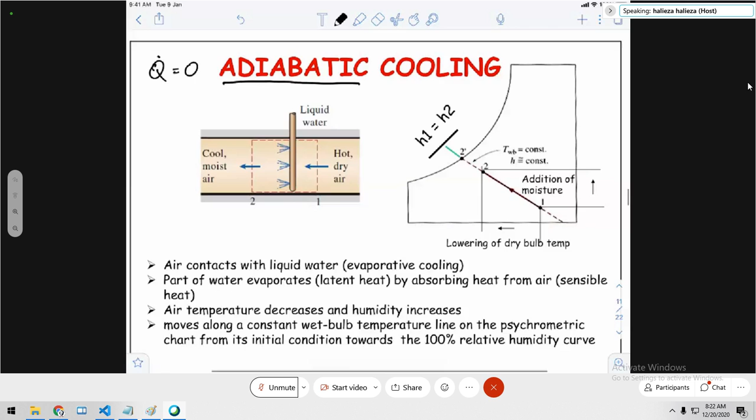So what happens here is you have hot air coming in, and you spray liquid water into that hot air. The water droplets will evaporate into the air, so there will be evaporation going on from the water droplets. When the liquid water evaporates, it absorbs heat from the hot air. So the hot air will cool down because its heat has been transferred to the liquid water. The heat is being taken from the hot air, going into the liquid droplet, which causes the liquid droplet to evaporate.

This is the system that sometimes you see in an outdoor restaurant at the patio, where you can see a huge fan with mist or water droplets being sprayed into the front area of the fan. This is the same principle, whereby the water droplet evaporates, causing the surrounding air to cool down. Sometimes you also have the portable aircon - it's not really an aircon, but it's a portable aircon that uses the same principle, which has the mist sprayed in front of the fan. Yeah, so this is the same principle.

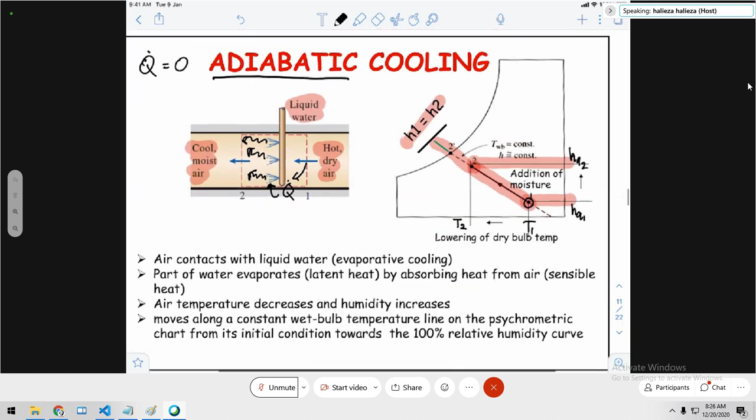So that is all about adiabatic cooling. You cool down the air adiabatically. That's what you need to know about the humidity chart. I've already introduced this part.

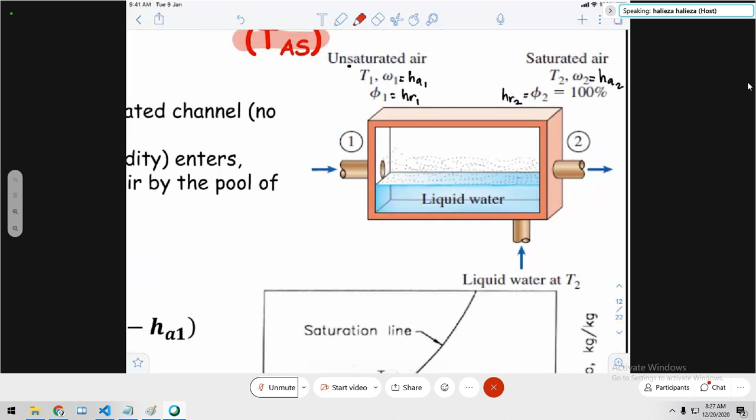There's another thing that you sometimes need to find: the adiabatic saturation temperature, symbol capital T subscript AS. This is the same principle, except now your liquid water is not in droplet form - it's really huge. You have a very long channel here containing liquid water. Your hot air is coming in at T1, having an absolute humidity of HA1 and relative humidity of HR1.

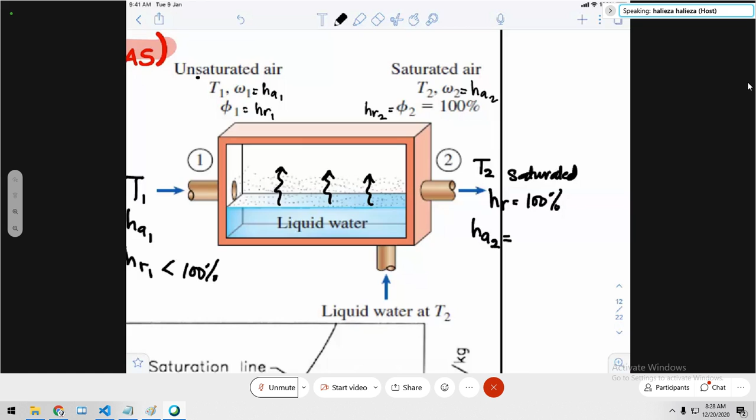By the time the water evaporates into that inlet air, because of the very long distance the air has to travel over the liquid water, by the time it reaches the outlet, that air at temperature T2 will be saturated. That means your relative humidity is going to be 100%. Before this, your relative humidity is less than 100%. If it's 100%, there's no way it can accept any more water vapor. So by the time it reaches the outlet, it should be saturated. Your absolute humidity is denoted by HA2, and definitely HA2 is much, much greater than HA1, the inlet value.

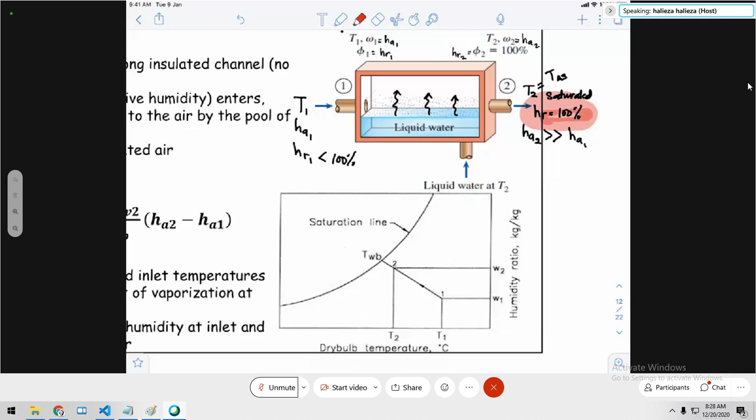So this is the temperature - T2 is going to be your adiabatic saturation temperature. That's the title of the slide, your adiabatic saturation temperature. So how to find that adiabatic saturation temperature is by going towards the 100% curve. So in order to find the adiabatic saturation temperature, it will be on the 100% curve. If you project it until it reaches that curve, then you will get your adiabatic saturation temperature. That's the equation here. Let's look at this, okay.

Oh dear, what am I doing? I'm trying to highlight this.

Your adiabatic saturation temperature is the same as your T wet. Why? Because your T wet is also obtained on the 100% curve. So if you drop that down, you will get your T wet or your adiabatic saturation temperature. It will be the same. Your adiabatic saturation temperature is going to be the same as your T wet bulb temperature.

If you want to calculate the temperature of your outlet, this is the equation that you can use, provided you know the latent heat of your water at T2, the outlet temperature. You need to know the latent heat of your water at the outlet temperature. If you know that, it shouldn't be a problem to calculate the outlet temperature.

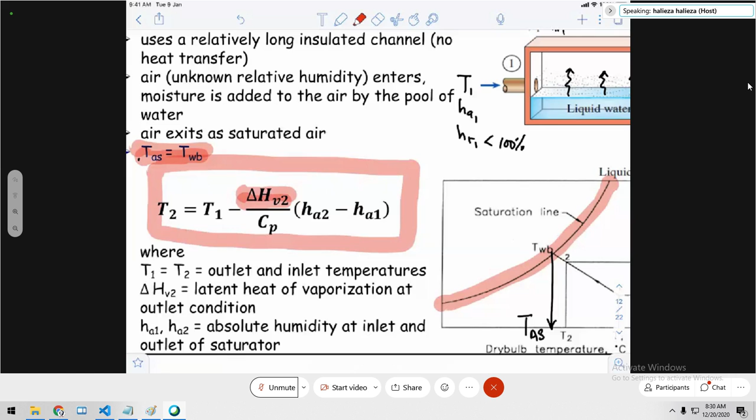But if you're going to calculate the adiabatic saturation temperature, you can just read it off from the psychrometric chart by projecting your line from the point of interest, the initial condition, to the 100% saturation curve. Then you drop it, and you will get your adiabatic saturation temperature. It's going to be the same as your T-wet temperature. T-wet bulb temperature is going to be the same as your adiabatic saturation temperature. That's another thing you need to know.

Let's see whether we have one example. Any questions so far before I proceed with the example? Anybody want to ask anything on this topic? Clear, good, thank you Ibrahim. Somehow nobody wants to speak. Everybody prefers writing, that's okay, no problem, but it took quite some time to type. It's faster to speak, but then it's no problem.

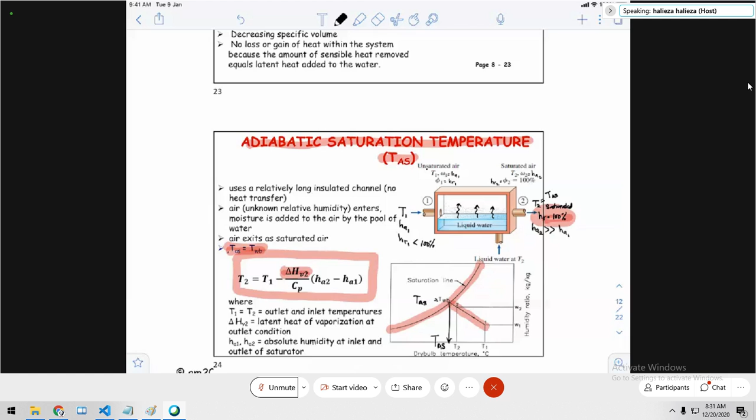Let's proceed with an example from your textbook. You have a stream of air at 30 degrees C, 10% relative humidity. It's going to be humidified in an adiabatic spray tower. The pressure for that system is 1 atm. The outlet air is not going to be saturated, it's going to have a relative humidity of 40%. You need to find the absolute humidity and the adiabatic saturation temperature of the entering air.

That means you're going to find the T-wet. The adiabatic saturation temperature and the T-wet are going to be the same. Let's look at our chart - I don't have my chart over here, I need to get my chart. I need to use the psychrometric chart, so let's look at our psychrometric chart in SI units.

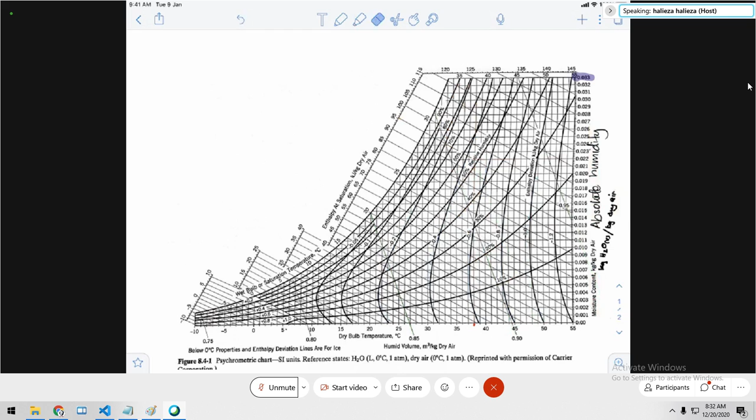Let me erase this, there's too many things here that will confuse us. Let me tidy it up, and bring this over to the example so we can have everything in the same slide, the same view. Let me just copy this.

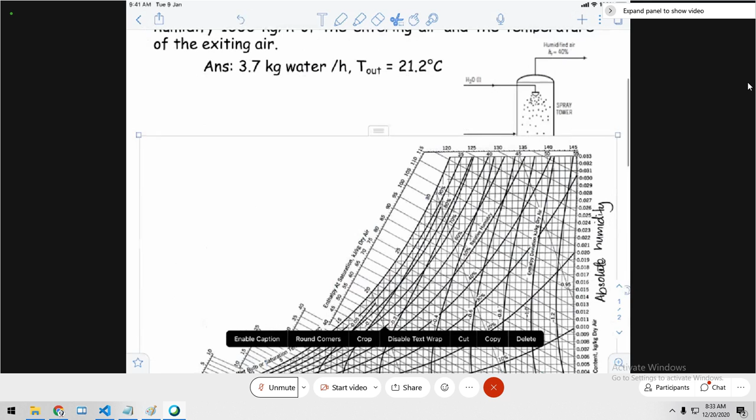That's done, let's see what is being asked here. You need to locate your inlet air position on the psychrometric chart. The air is at 30 degrees C and 10% relative humidity. Let's look at your psychrometric chart - I'm going to change the color of this pen so it's not black, or else it won't be that obvious. Let's use red. That's 30 degrees C, I'm going to project a straight line.

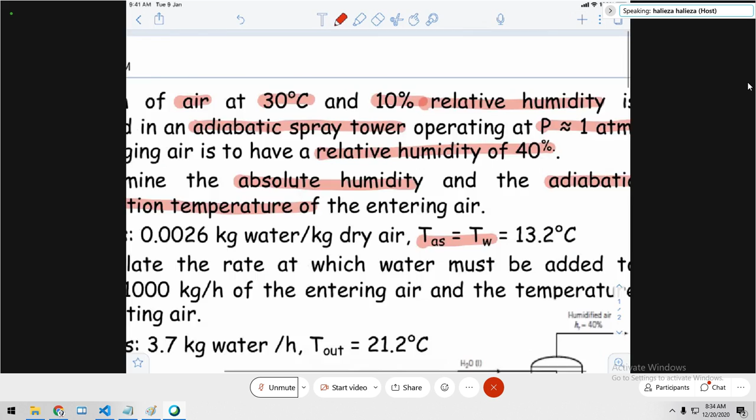Try to get a straight line - yeah, that's a straight line. The relative humidity is 10%, not 10 degrees C. So if we highlight the 10% relative humidity curve, where the two of them intersect - the 10% curve and the 30 degrees C line - is the point of interest. If I enlarge this, our point of interest is going to be here.

So that is your inlet position of your air. What else do we need to know, what else do we need to find from this question? You are asked to determine the absolute humidity, which is on the right hand side on the y-axis. Your absolute humidity is the moisture content.

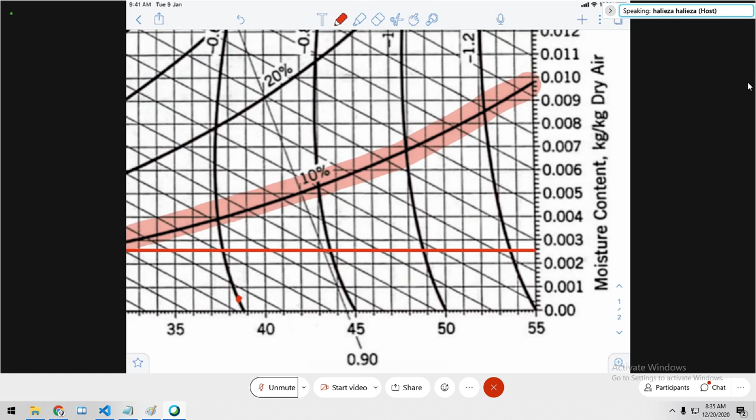If you project it horizontally from that point of interest to the y-axis, you're going to get a straight line. Roughly, if you look at the scale, it's going to be about 0.0025 or 0.0026. If I enlarge this, that's roughly the value of your absolute humidity.

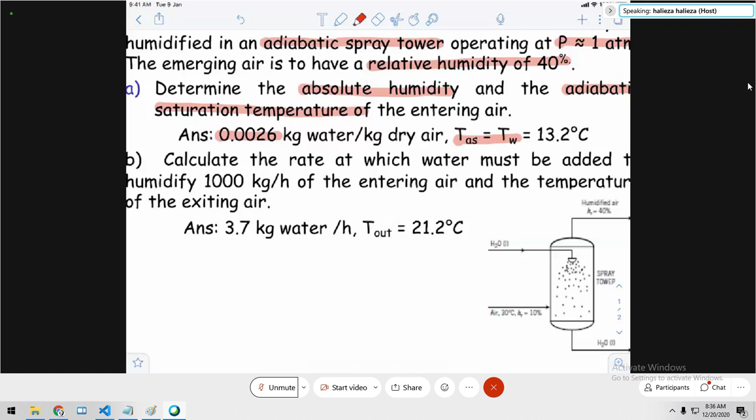So let's have a look at the solution. The solution here gives you a value of 0.0026. That's roughly what we also obtained just now when looking at the psychrometric chart. It depends on how straight your line is, and also how you draw your line. So it's roughly about 0.0026.

The other part of the question asks for the adiabatic saturation temperature. To get that, you need to project from your inlet condition diagonally towards the enthalpy, using the enthalpy line. I'm going to change the color to green. So your enthalpy line, that's the diagonal slanting line.

So you project from your point of interest, parallel to that enthalpy line, towards the 100% relative humidity. I'm going to draw that straight line diagonally from the point of interest towards the 100%, parallel to the slanting line. Make sure I can get it straight. Okay, that's roughly a straight line.

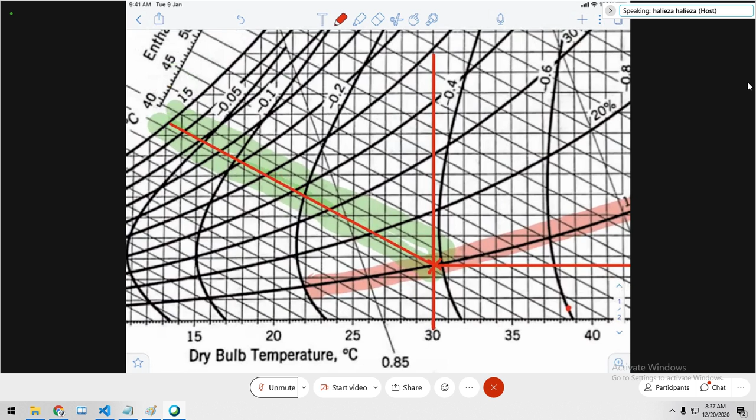If you look at the 100% curve, you also have the temperature given there. This is 10, that's 15. Let me undo that, I'm not going to have it in green color, let me use red instead. Okay, that's 10, that's 15. So our adiabatic saturation temperature is about, let's see, 11, 12, 13, about 13.5. Roughly, it could be 13 or 13.5, but I don't think it's 13 because it's not directly on the enthalpy line or the wet bulb line. It's somewhere around 13.4 to 13.5 roughly. So let's have a look at the solution.

(13.2). Okay, this is the answer here, giving a value of 13.2. Now I said our value is about 13.5, so that's acceptable - the answer 13.2 is not an absolute value. The author also obtained it using the psychrometric chart, so it's acceptable, 13.5 versus 13.2. But definitely it's not going to be 13, because if you look at 13, that's 13, and it's not on that line, on the slanting line, at 13 degrees C. It's definitely not 13 degrees C. So that's how you get your adiabatic saturation temperature for that inlet air condition.

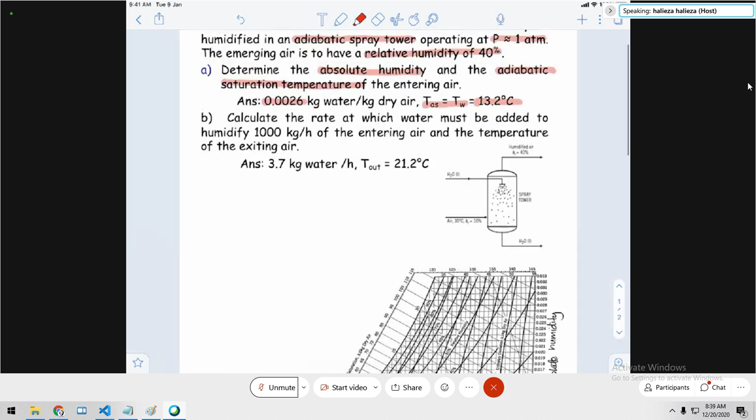Okay, next, what's the question asked for? Calculate the rate of water that must be added if you're going to have 1,000 kilogram per hour of the entering air, and the temperature of the exit air. We know that the air is going to come out at 40% relative humidity. Okay, so we're going to highlight that 40% first on the chart.

So if I'm going to highlight the 40%, this is the 40%. From the intersection of the red diagonal line that is going towards the 100% relative humidity, with the 40% relative humidity line, you will be able to get the point of intersection, which is over there. Let me undo that - this is your point of intersection. So if you look at that point and drop off, you get a straight line going towards the x-axis.

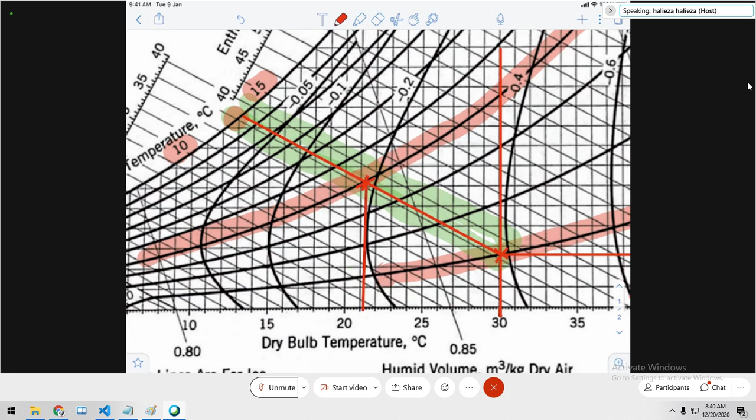I'm not really doing it very well because it's not really a straight line. It will be roughly 21.3 maybe. That's the temperature of your exit temperature. Let me write that using black color ink. That's about 20... 21.3 maybe, we see roughly.

So let's have a look at the solution. The solution over here listed it as 21.2. Well, very close, we got 21.3.

Okay, we got 21.3, but the solution gives us a value of 21.2. If you get 21.2, if you get 21.4, obviously it's not 21 because it's not on that straight line. There is somewhere beyond 21. That's the exit temperature.

The second part of the question asks you to calculate the rate of water that needs to be added in. That means the amount of liquid water that you're going to add into your inlet air. How are we going to do this? We're going to do a material balance on the water, because we should be able to calculate that if we know the relative humidity of the inlet and outlet air.

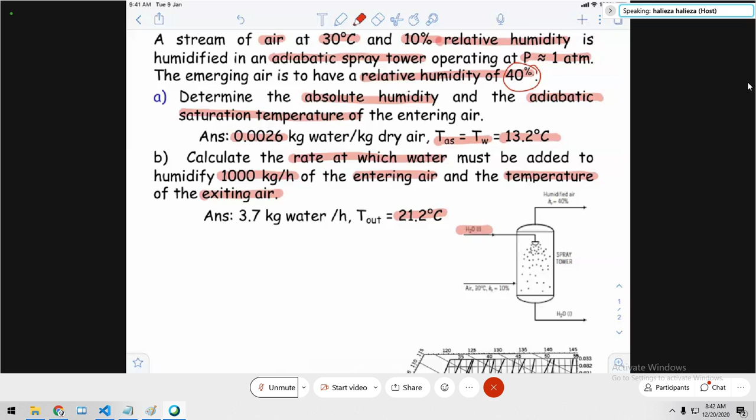So let's get the absolute humidity of your air for the outlet first. Your outlet temperature we already managed to get just now. Now we need to get the absolute humidity.

From the point of interest of the outlet condition, I'm going to use red. So that's the point of interest. I'm going to project a straight line. This is really not a straight line. That roughly goes there, and that is your absolute humidity for the outlet condition.

It's about 0.006, let's see. I would say it's not 3 because my line is not really that straight. If you have a look at the line, it's about 0.0062. Okay, so let's take it as 0.0062.

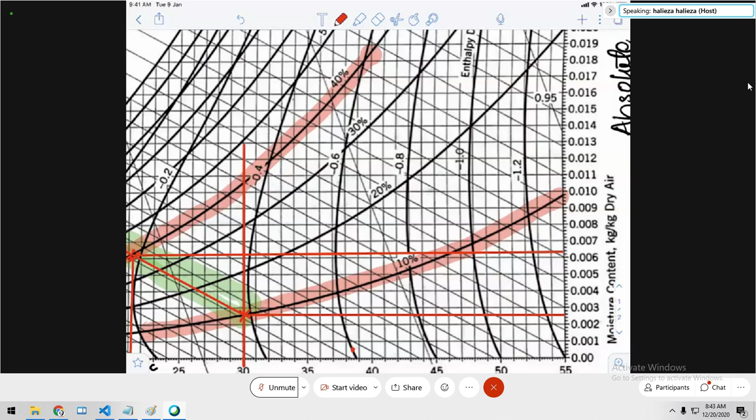That's for the absolute humidity of the outlet air. So I'm going to write that here. My outlet, HA2, is going to be here, in black color. HA2 is equal to 0.0062 kilogram... I don't have enough space to write. Kilogram water vapor

per kilogram dry air. And for the inlet, just now, for the inlet A, we managed to get about 0.0026. Okay, for the inlet HA1, we have the absolute humidity of 0.0026 kilogram water vapor per kilogram dry air.

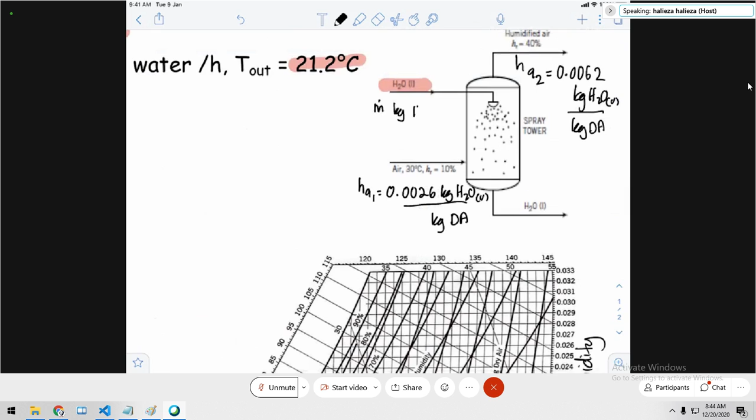So the amount of water that we're going to add in, we're going to give it a symbol of M with a dot - that's a flow rate, kilogram water liquid per hour. The question states that you're going to have 1,000 kilogram per hour of the entering air. So your entering air is going to be 1,000 kilogram per hour. That is your humid air.

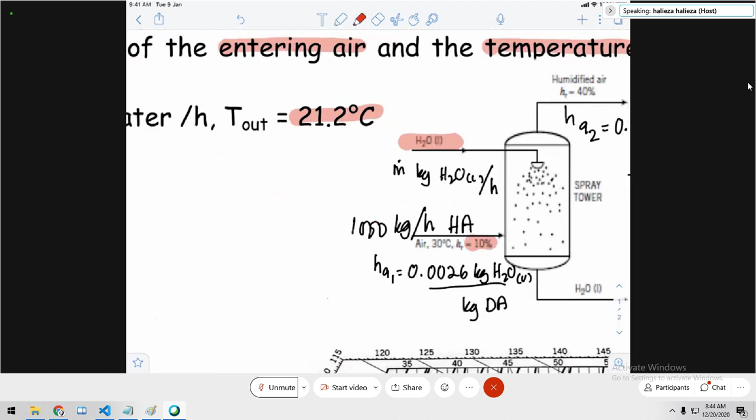Why is it humid? Because you have 10% relative humidity there. That implies there is water vapor inside your inlet air. So it's humid air, it's not dry air. But the thing is, in order to do the material balance for water, the unit for the absolute humidity is per kilogram of dry air.

So you need to find the kilogram of dry air that is entering. The amount of dry air that is entering is going to be the same amount that is in the outlet air - it's going to be the same in the inlet and the outlet.

So we need to find the kilogram of dry air coming in, and in order to do that you need to use the absolute humidity of your inlet condition. So let me write that using black ink. Coming in is 1000 kilogram per hour of your humid air, and you have a value of 0.0...

I need to find the kilogram of... let me see, I need to find the value of the entered dry air. Anybody have any idea? I can find the value of the water if I use the absolute humidity, but not the value for the kilogram of dry air. So anybody have any idea how to find it? Anybody? Nobody?

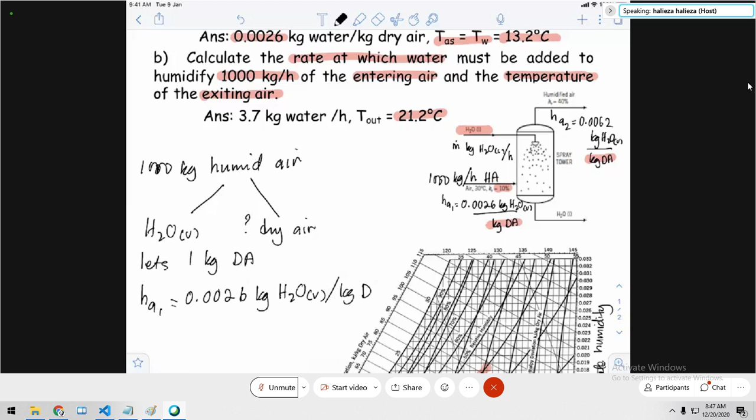Based on the absolute humidity of the inlet air, you have a value of 0.0026 kilogram water vapor per kilogram of dry air. That is the value you get from the psychrometric chart earlier. If I enlarge it, zoom in, that's the value we got, 0.0026 at that location. So that is the absolute humidity, and the unit is per kilogram dry air. So if you assume it's going to be 1 kilogram of dry air, that means for every 1 kilogram of dry air, you're going to have 0.0026 kilogram of water vapor.

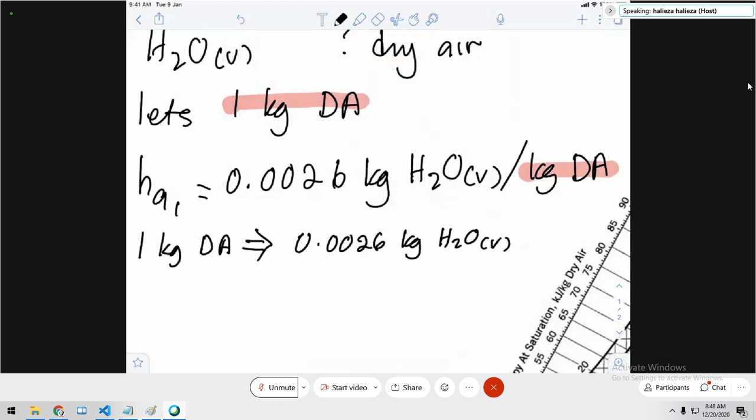For every 1 kilogram of dry air, the amount of water vapor is going to be 0.0026. So if we put that value here, the amount of dry air we say is going to be 1 kilogram, and the amount of water vapor you're going to have is about 0.0026 kilogram.

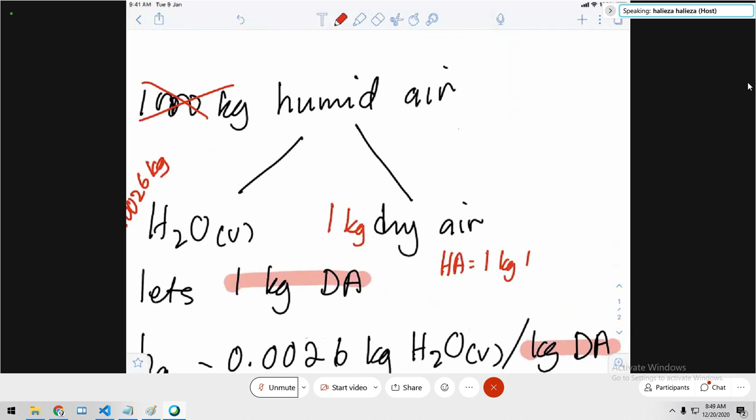So the total amount of humid air - don't look at this part, we're not going to look at this part because we already assumed 1 kilogram of dry air. So your humid air is going to be 1 kilogram dry air plus 0.0026 kilogram of water vapor. That gives you 1.0026 kilogram of humid air.

So we need to know this, because based on that value, you can use it to change that 1 kilogram into dry air. This is humid air, this is also humid air, then you can change your humid air into dry air, the value for the dry air. So let's do that.

Any questions so far? This is the tricky part, whereby you're going to use the information by assuming 1 kilogram of dry air. That's the tricky part. Any question? Anybody? Nobody? No question? Are you with me, guys? Am I speaking alone?

I hope there's no lagging, because I don't know what's coming up for your psychrometric chart. Dr. Jamaliza is going to set that question. She only said that you need to print the psychrometric chart, it's going to be given to you, and you need to print it out. You need to turn it in together with your solution, you need to scan it together with your solution, because she'll be giving marks on how you get the values from the psychrometric chart. So you really need to know that. And then this question, example 847, I'm not sure whether it's coming similar to this example or somewhere similar to the other example. I don't know. So just be prepared.

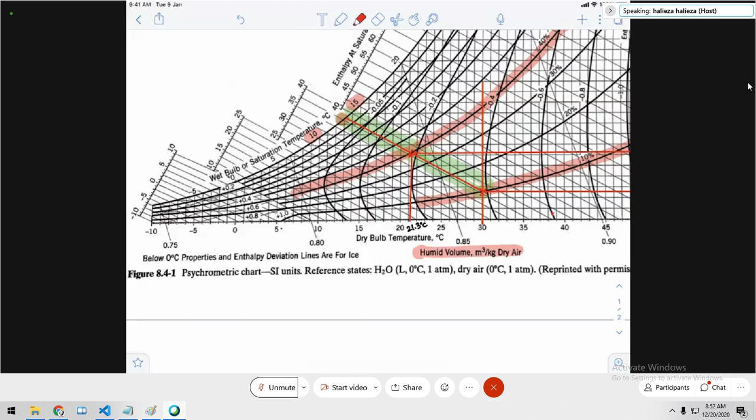Before this, we were given the volumetric flow rate of the entering air, and we used the humid volume from the chart, but this is slightly different - you are given in kilogram, not the volumetric flow rate. Before this, for the previous example, we were given the volumetric flow rate of the humid air and converted it into dry air by looking at the humid volume from your psychrometric chart. You have done that using the previous example. So the difference in this example is that your entering air is not given in the volumetric flow rate, it's in terms of mass flow rate. That's the difference.

So now, to get the dry air coming in, I'm going to proceed further down here. You have 1,000 kilogram per hour of humid air, and you know that for every 1 kilogram of dry air, you have 1.0026 kilogram of humid air per kilogram of dry air. That's why when you did the calculation just now, you assumed 1 kilogram of dry air, to make sure this unit is for every kilogram of dry air. So now, using that value, you should be able to cancel your kilogram of humid air and end up with kilogram of dry air per hour.

So if you do that calculation, your answer will be 997 - somebody check, I get that value from the textbook, not sure whether that's correct. So let's do the calculation... 997.406, okay just write 997.4. Okay, Sam, thank you Muhammad Salim. Okay, Sam Ibrahim, okay good.

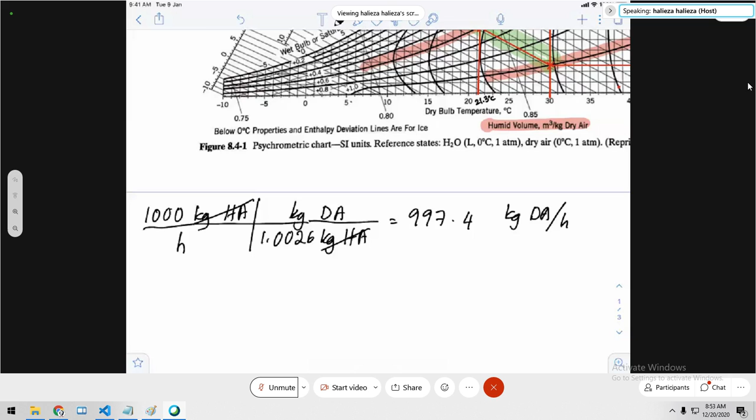So that is your amount of kilogram of dry air coming in every hour. So if you look at the diagram, we're going to write that - I'm going to erase this, I'm going to write that the kilogram of dry air, that value is going to be 997.4. That's the same value coming out.

997.4 kilogram per hour of dry air, same value coming out. So what is required now? We can proceed to calculate our rate of water coming in.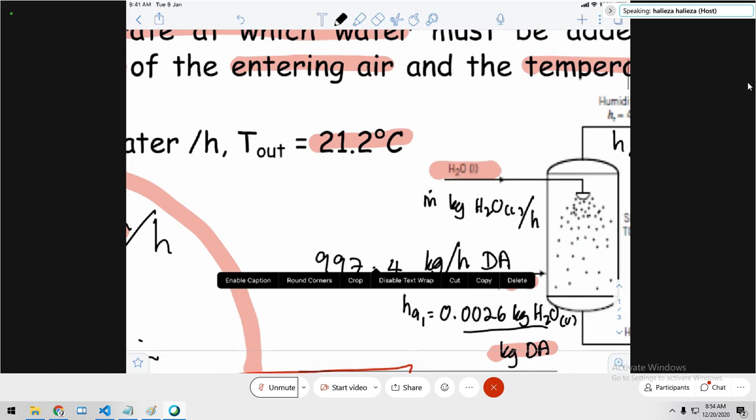We use M for the rate of water coming in. So we're going to do our material balance. Ignore this stream. We're going to assume that the amount of water coming in is the same amount that is going to evaporate, so there will be no leftover water coming out from the system.

So we're going to do our material balance. It's going to be the air coming in, the water coming in, that's one. And then there's the air coming in, that's equal to the air going out. But we're not doing our balance on air, we're going to do our balance on water. So let's do that.

Water balance. So if you look at the diagram just now, you have two streams coming in, and one stream coming out. Right? So let's do our balance on water.

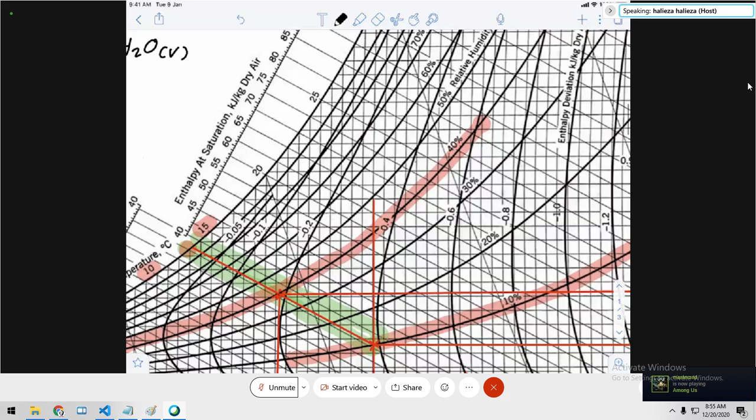The mass flow rate of the water that will be supplied into your adiabatic cooling tower, that's kilogram. I'm not going to write the unit, we know it's going to be in kilogram water. So because it's just on a water balance, plus the amount of water in the inlet stream. You know that your amount of water in the inlet stream is based on the amount of dry air and the amount of your absolute humidity. You can calculate your amount of water because you can cancel off your dry air.

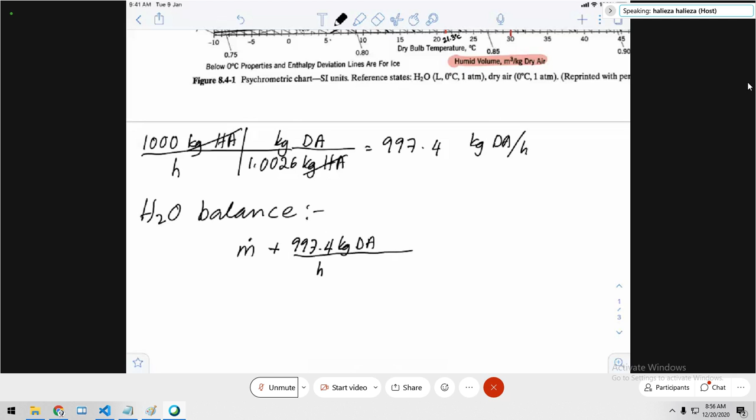Okay, so let's do that. 997.4. Over here, I'm going to show you the unit, that's kilogram per hour of dry air. And you have the absolute humidity just now, we have...

0.0026, oh dear, it should not be at the denominator, it should be at the numerator. 0.0026 kilogram of water vapor per kilogram of dry air, that is your absolute humidity. So you cancel off your kilogram of dry air, you end up with the amount of kilogram of water per hour.

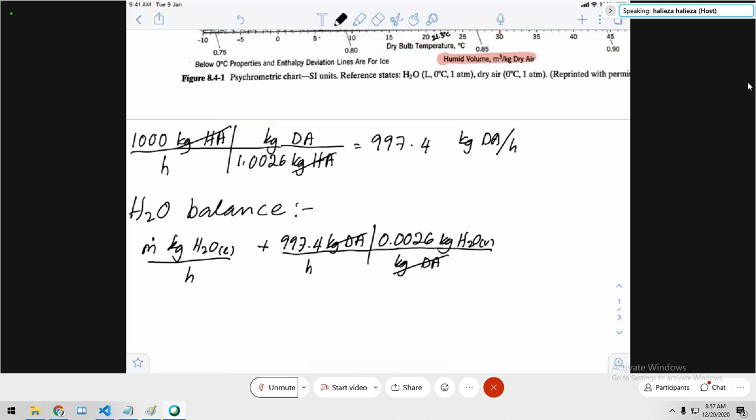So I'm going to erase this because I think I better put down the unit, to be consistent. Kilogram water, this is liquid, per hour. So that's your inlet. Now your outlet, so if we look at the diagram again, the air going out still has the same amount of dry air coming out, but the absolute humidity is different.

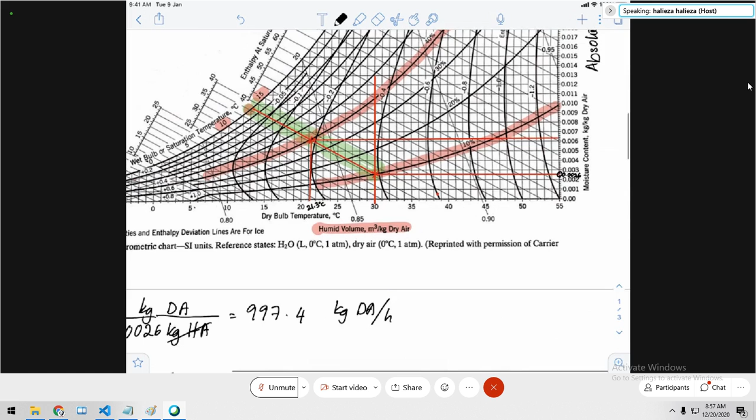Now it's 0.0062. If you look at the stream going out of the tower, it's 0.0062 kilogram water vapor per kilogram of dry air. So you're going to have the same value of the dry air, multiply it with the absolute humidity of the outlet air, that's per hour. And just now we said the absolute humidity is going to be 0.0062 kilogram of water vapor per kilogram of dry air.

Cancel off the kilogram of dry air, you end up with all the terms in terms of kilogram per hour of water, whether it's liquid or whether it's vapor. It will be your water balance. So now, all you have to do is solve for your...

amount of water that is coming in, or the rate of the water that have to be supplied is going to be, if you bring this over to the other side, it will be deducted from the initial, from the other term. So take out the same amount of kilogram of dry air, it's going to be the same. Right? So 0.0062 minus 0.0026, you will get a value of 3.7.

Let's do the calculation. The answer from the textbook is 3.7. So let's do the calculation just to double check. 3.59064 kilogram per hour of water that need to be supplied. Well, that's slightly different from the solution given in the textbook. The textbook gave a value of 3.7, we managed to get 3.6.

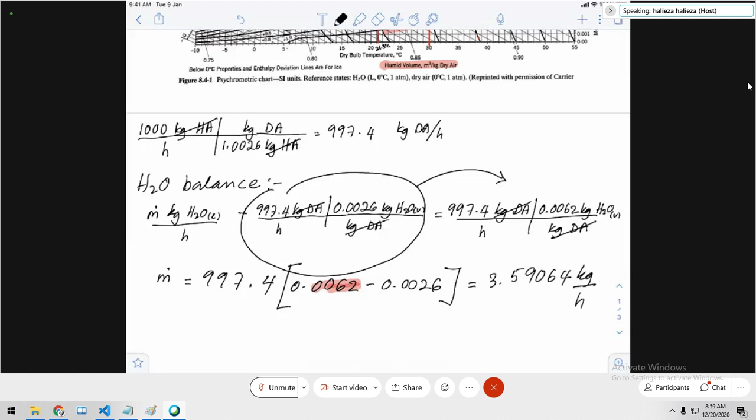So that's your final value, your solution for the rate of water that need to be supplied to your cooling tower or your adiabatic spray tower. So the question asks for the rate of water that need to be added to humidify your 1000 kilogram per hour of entering air. So guys, any questions before we take a 5-minute break?

Any questions? The most important thing that you need to take note of is this part on the absolute humidity, how to get the amount of kilogram of humid air. You really need to know how to do that, because it's not given in volumetric flow rate, it's given in kilogram of humid air coming in. So you need to assume 1 kilogram of dry air, and from the absolute humidity of your inlet condition, you should be able to get the total amount of your humid air.

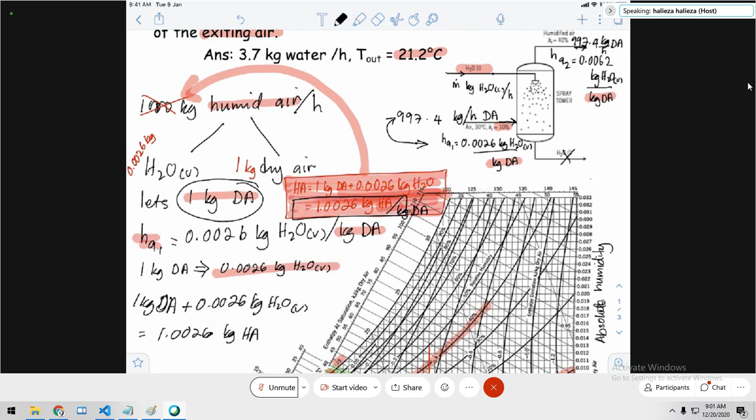Let me write that down. The total amount of humid air is 1 kilogram dry air plus 0.0026 kilogram of water, so that will give you a total of 1.0026 kilogram humid air. That information will help you to solve the amount of dry air in your inlet stream and in your outlet stream for every 1 kilogram of dry air.

Any questions? Okay, somebody asked a question. You got 3.59? Arif, you got 3.59? Okay, same with me. I got 3.59.

Thank you. Okay, there's another question from Hai Chin. Hai Chin, is it correct? Doctor, why is the output of liquid stream water cancelled? Okay, why is it cancelled?

Because we're going to assume that the amount of liquid water coming in is just enough for you to evaporate in order to cool it down to the required temperature. The final temperature, which is 21.2 degrees C, that's the final temperature and the final relative humidity. That's the amount of liquid water that needs to be evaporated or supplied to the inlet air in order to reach that desired outlet condition.

So that's why we ignore the outlet water. The outlet water has nothing to do with cooling it down anymore. It's the excess water, you don't need it anymore. You just need the amount that will cool down your inlet air to the desired humidity and desired temperature. That's why you ignore the bottom flow rate of your liquid water. Okay, that's the reason. Any other questions?

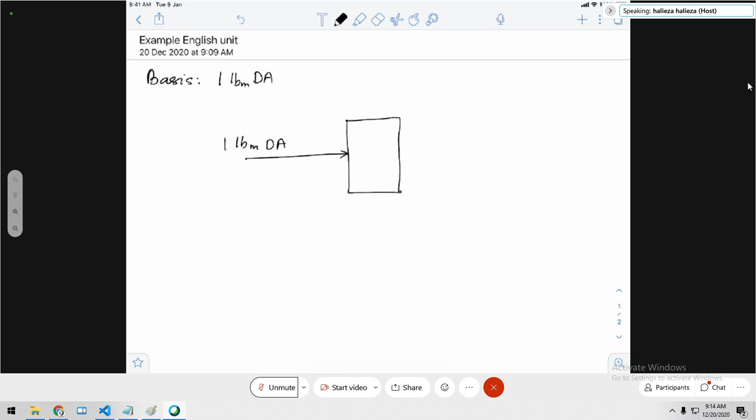You have your 1 kilogram of dry, so not kilogram, sorry, I need to erase that. It's in English unit, it's not in kilogram. It's going to be 1 pound mass, 1 pound mass of dry air. That's the amount. That's one. Your temperature coming in is 80 degrees Fahrenheit. Your relative humidity is going to be 80%.

And what else? We're going to cool it down to a value of 51 degrees Fahrenheit. That is the only information given except for the pressure. For both the inlet and the outlet, they are both at 1 atm.

You're going to have water coming out, condensing. So that's going to be liquid water. That's going to be pound mass. We don't know the amount of water. Let's give it a value of, this is going to be, we're going to use the same symbol as the textbook. So this is going to be M3. Okay, that's M3. Your outlet air is going to be noted as M2 of pound mass.

I'm not going to write it there, I'm going to write it below here. M2 pound mass of water vapor in it. That is water vapor. So M1 is actually the pound mass of water vapor in the inlet air. M2 and M1, and M is not the amount of the total flow rate. We are just looking at the amount of water vapor in the inlet and outlet. They are not the total humid air. And the M3 is the liquid water that condenses.

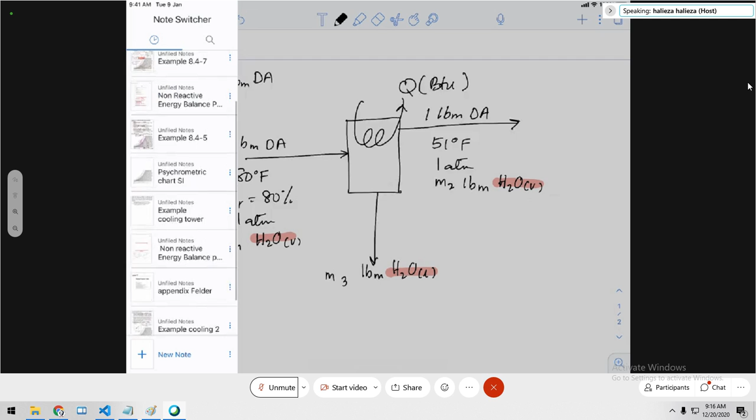Before that, I need to show you guys the psychrometric chart having the English unit. Where is that psychrometric chart in the English unit? Let me get the chart in English unit. Okay, this is the chart. I need to copy this so that it be in the same slide as our example. This chart is really, okay, there's a lot on it. So let's copy that and let's go to our example.

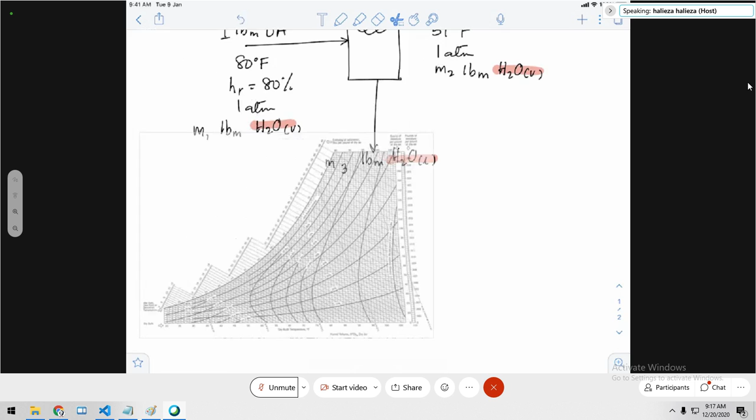So this is our example. I'm going to press it. I'm going to do it down because of overlapping here. Okay, that's it. Now tell me what to do, guys. What should be the step?

The next step, we need to find the absolute humidity as well as the specific volume from the chart. Can you repeat that again? We need to find the absolute humidity for the inlet condition and as well as the specific volume, for the inlet and the outlet condition, the absolute humidity, and what else do we need to find? Specific volume. The humid volume, you mean? Yeah, humid volume. Okay, humid volume for both inlet and outlet. Okay, let's go about that.

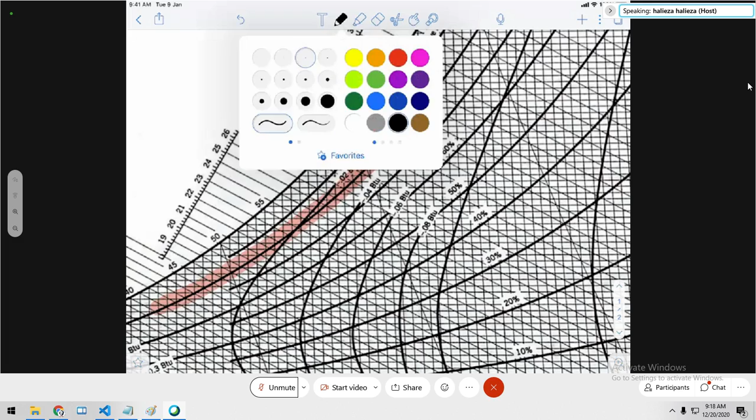So humid, absolute humidity for the inlet condition. So the inlet condition is 80% and 80 degrees Fahrenheit. So let's zoom up. Where is 80%? That is 80%. And where is our, I'm going to change that to red. Our 80 degrees Fahrenheit is somewhere here. That is 80 degrees Fahrenheit.

So I'm going to, let's see, draw a straight line through that line, to that 80%. Sorry, 80 degrees Fahrenheit, I keep on using SI unit, I'm so used to SI unit. I need to get smaller so that I can draw a straight line right up to the 80%.

Okay, is that a straight line? Not really a straight line, but okay. Doesn't look like a straight line, but better than nothing. That is your 80% relative humidity. So our point of interest will be here. It will be there. That is our point of interest.

Okay, so if we go through horizontally, we get the absolute humidity. So let's look at the scale. This is a bit tricky. There's two scales over here. That is grains of moisture, this is pound of moisture. So which one are we going to use? The second one, pound of moisture. Okay, thank you.

So we're going to draw a straight line horizontally from our inlet condition to the second scale. That's... I should be getting a line on that, on the straight line. It's not straight, I mean it's not on that line. Is it on that line? It's somewhere in the middle.

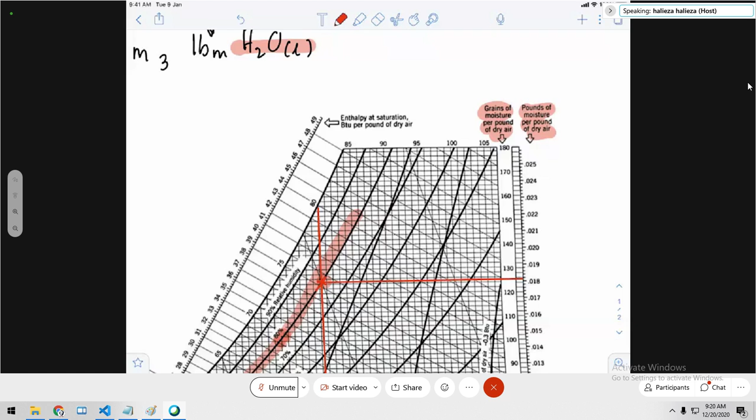That's roughly, what is this for me? Interval 1, 2, 3, 4, 5. Okay, that's roughly 0.0182. Write it as 0.0182. Not sure what your textbook gives for that value. So let's see what the textbook has for that value. Oh, the textbook gives a value of 0.018. We somehow managed to get 0.0182, no problem. So we stick with 0.0182.

I'm going to change this to black color. So that is going to be 0.0182 pound mass of water vapor per kilogram. Okay, I need to erase this amount. Okay, I need to get that. Then I can write per kilogram of dry air. Okay, this is now M3, mass of water.

Doctor, I think it should be per pound mass of dry air. Pound mass of dry air. Yeah, thank you very much. I seem to be so used to SI units, I'm not used to English units, so thank you.

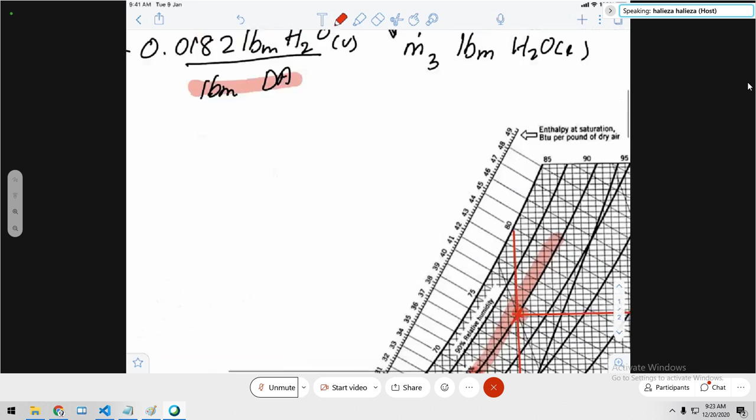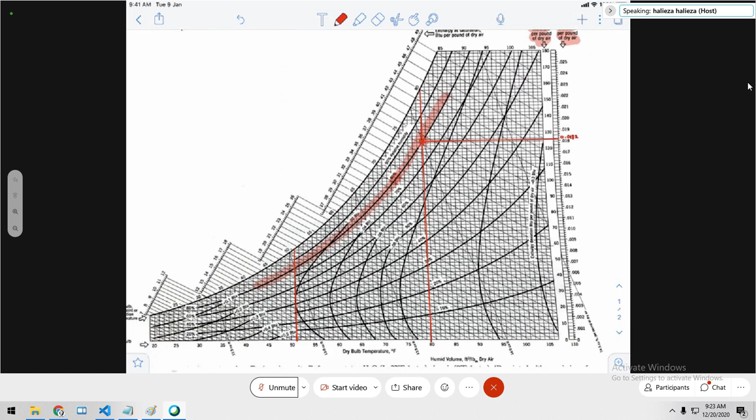Let me look at the question again. You're going to cool down to 51 degrees Fahrenheit. Yes, it's saturated, I think. It's going to be saturated. There's no mention of it being saturated, but somehow we're going to assume so, because there's no way we're going to find the final condition if we don't have it saturated, isn't it? Because we only have the temperature. With only the temperature and no relative humidity, there's no way of getting the second position. So we're going to assume that it is saturated. I think it's 100% relative humidity because the water has condensed.

Sorry, I can't hear you, it's lagging. I said the relative humidity might be 100% because the water has condensed. Okay, the question says that the water condenses, right? Okay, you got it, the water condenses. So that means it's going to be on the 100% curve. Right, that's right, very right. You're very right there, okay, thank you. So it condenses, so it has to be on the 100% curve.

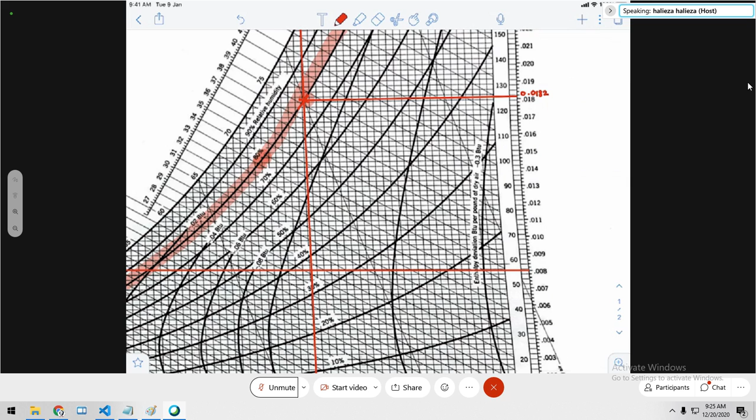So if we look at that position, it will be here. 50, that is 50, that's 50, and it's listed there as 50. So we're going to find the absolute humidity by projecting it horizontally to the humidity scale. If I use that as the line, we're getting a good line there. Okay, roughly that's going to be 0.008, and that's your absolute humidity for the second position, 0.008. That's your final position.

So if you're going to write it down, use a black marker. 0.008 pound mass of water vapor per pound mass of dry air. Again, we know that we're going to have 1 pound mass of dry air in the outlet, so the amount of water vapor in that outlet stream is going to be the same value, which is 0.008. That's the amount of water vapor. So now you already have your inlet air having the amount of water vapor in it.

0.018, and the amount of outlet air having a value of 0.008. So you should be able to do the material balance. Based on the material balance, be able to solve for the amount of water that condenses. So do the material balance, your water balance.

Somebody tell me how to write it. M1 equal to M2 plus M3.

Okay, we have the value of M1, M2, which is equal to 0.008 plus M3. So solving for M3: 0.0182 minus 0.008. That will give you a value - let me calculate, so that we can check what is the answer. Even in the textbook, obviously it's not going to be the same because we already know we got a different value just now for the absolute humidity. So this is going to be your pound mass of water that condenses.

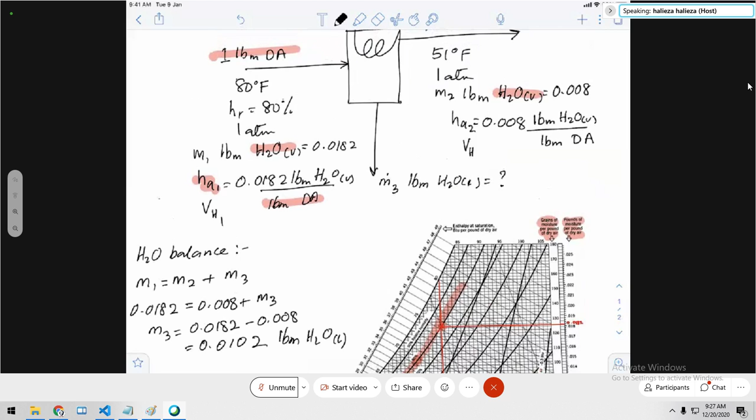So now let's look at the next part of the question. It asks for the amount of water, the fraction of water that condenses. We already have a value of 0.0102 pound mass of water that condenses. It asks for a fraction of the water that condenses. How are you going to go about that?

Anybody give me an idea? Divided out by the total mass. Total mass of what? Of water. Where? Which one? The entering water. Okay, so that value that condenses divided by total value that is in the inlet, the amount of water in the inlet, which is M1.

Or 0.0182 - so if you divide that by 0.0182, the total amount of water in the inlet, that will give you a fraction of 0.5604. Okay? That's what I got. Did you get the same value?

Anybody getting a different value? Yes, you did? What value did you get? Same. Okay, thank you. So that's the fraction it asks for. So that's the other part.

It asks for the amount of heat that need to be removed for every 1,000 cubic feet per minute. But our basis now is 1 pound mass. We do it based on 1 pound mass of dry air first. So we need to find the enthalpy for the inlet and the outlet condition.

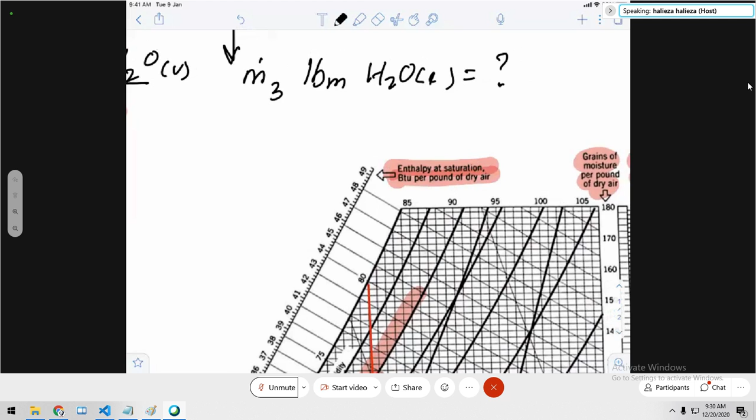You realize that so far, most of the unit is per pound of dry air - that's for your enthalpy. And the other thing, your absolute humidity, is also per pound of dry air. It could be pound, it could be kilogram, that's the unit. So the reason we choose our basis as per pound of dry air is because that makes it easier to calculate. Okay, so now that's your enthalpy at saturation.

Where is the deviation? Let me highlight the deviation using a different color, blue. Is there enthalpy deviation? I can see enthalpy deviation over here - that's your enthalpy deviation curve. It's somewhere like here, yeah. I will go up to here. After this, there's no more.

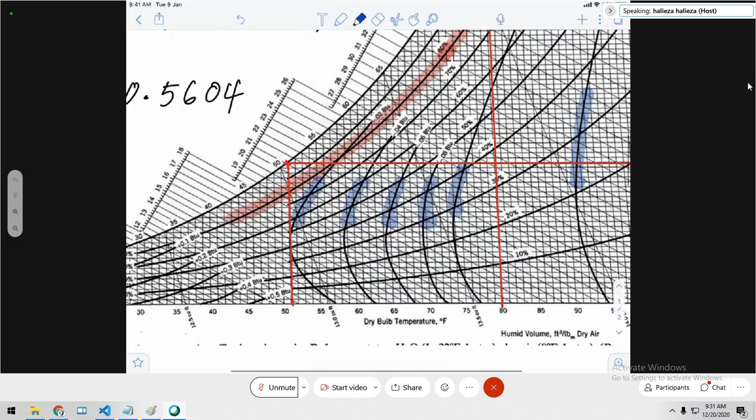So for your inlet, where is it? Your inlet is here, at that point. And the enthalpy deviation - if we project it, this enthalpy deviation stops there. Yeah, another enthalpy deviation stops there. So enthalpy deviation for minus 0.06 stops there. This also stops there. The next one will proceed right up to the top of the graph.

But your location of interest for the inlet is there, and you have no other enthalpy deviation except for the one on the right, which is minus - what value is that?

I cannot see the value. What is the value? Let me zoom out.

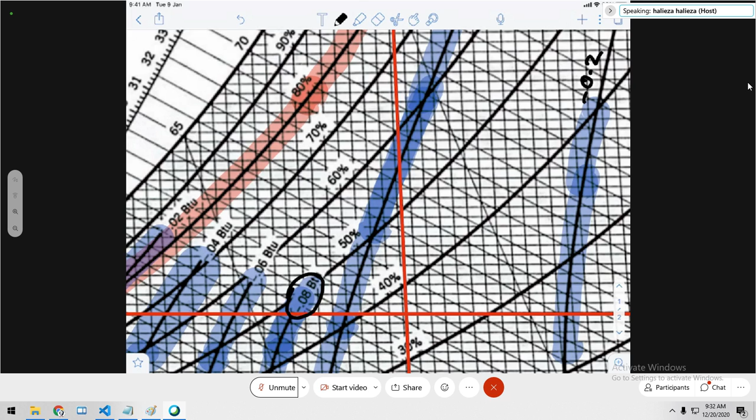Based on this, minus 0.3, that's minus 0.2. So that is minus 0.1 BTU. But the one on the left hand side, minus 0.08, is stopped there, meaning it is too small, the enthalpy deviation is too small for you to deduct it from the saturated enthalpy. So you can just get your value of enthalpy from the enthalpy scale without deducting the enthalpy deviation, because it stopped there - it doesn't reach up to the top. You can ignore the enthalpy deviation because it's too small.

Okay, so now we're going to project it. I'm going to use a red line, projecting it to the enthalpy scale. Make sure I get a straight line. That's roughly 39, about 39. But the unit is BTU per pound. That's 39 BTU per pound mass of dry air. I need to write that in black ink. Okay, so that's 39, that is your inlet condition.

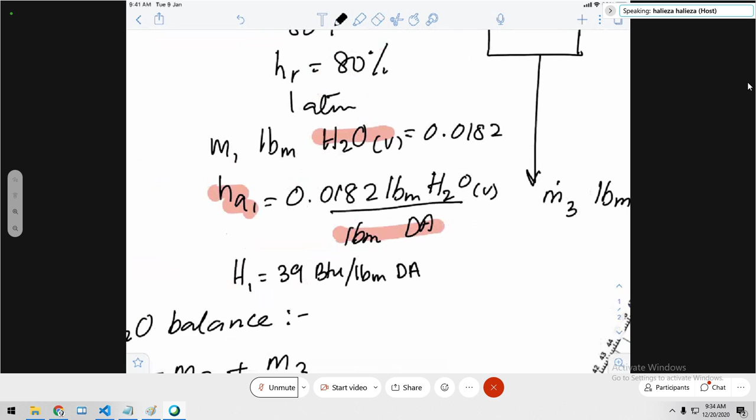The enthalpy of inlet condition. So we're going to erase this. Your enthalpy 1 is 39 BTU per pound mass of dry air. Okay, so we do the same thing for the outlet, the outlet air, so that's H2. Specific enthalpy, it has to be specific enthalpy because it's per pound mass of dry air.

So for the outlet, where is our outlet condition? Our outlet condition is there at 51, so it's already saturated. So all we have to do is just project it towards the enthalpy line. Okay, so that is about 22, 24, 26, 28. So 20.8, that's the value 20.8. So if I write that, that's value 20.8. Not yet 21. So that's 20.8. So our enthalpy 2 is going to be 20.8 BTU per pound mass of dry air.

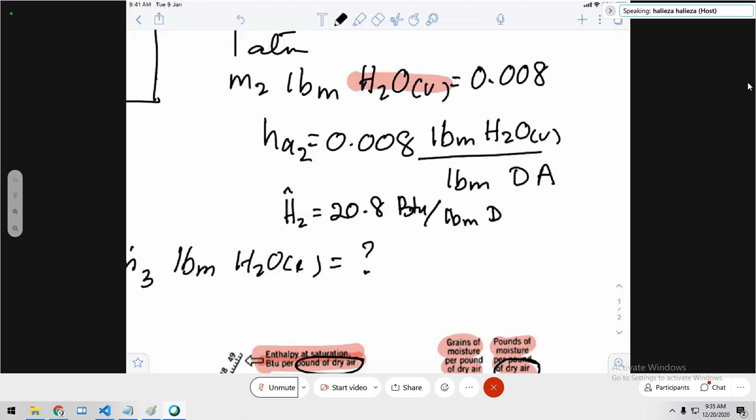What next, guys? Before that, somebody suggest something. I missed something. Reference state. Yes, thank you very much. And what is the reference state? Based on the table psychrometric chart condition. I know, but the thing is, I can read it from this chart. Let's see, the one that I have over here. What is the reference state?

Can you see? The reference state should be liquid water at 32 degrees Fahrenheit. The dry air should be at 0 degrees Fahrenheit, 1 atm. Yeah, it should be at 32 degrees Fahrenheit, 1 atm. So write down that as your reference state for that example just now. Yeah, water liquid at 32, dry air 0. So let's go back to our graph, to our example.

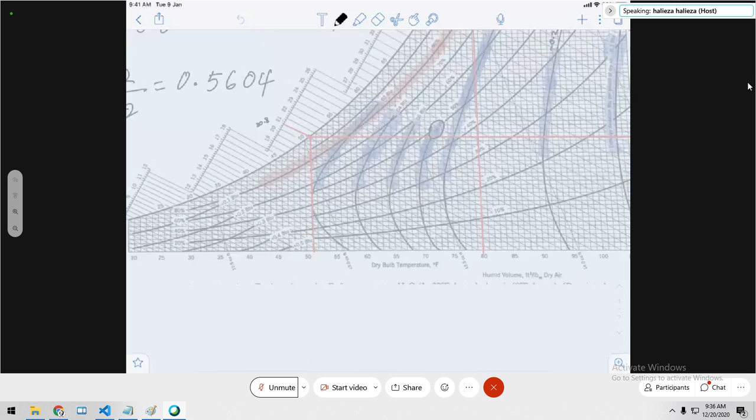32, take note of it. So reference state, once you use the psychrometric chart, you must follow the same reference state. Reference state or reference condition - it is liquid water. You can write like this: liquid water, 32 degrees Fahrenheit, 1 atm. And you have your dry air. How does it say this? Now, I know it's 0 degrees Fahrenheit and 1 atm, but let's have a look.

Okay, 0 degrees Fahrenheit. You don't need to write gas because air is only in a gas form. There's no way air is going to be in a liquid form. So you don't need to specify the phase of dry air. Okay, so that's your reference state. Okay, next. What next? What's next, guys?

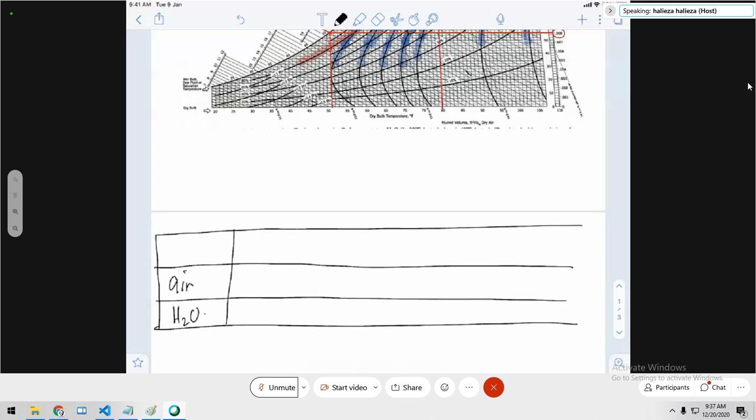Your amount of air coming in is what? What should be to fill up that table? What is the amount of air coming in? 1 pound mass. Okay, good. 1 pound mass because your unit of enthalpy is per unit pound mass. So that will be 1 pound mass of dry air. Same over here coming out. There's no water coming in, but there is water coming out. What is that mass of water coming out?

Anybody? What is the amount of water coming out? It's the mass, like 0.001. You have too many zeros there. It's 0.0... oh yeah, right. 0.0102. Okay, so 0.0102, that's the pound mass.

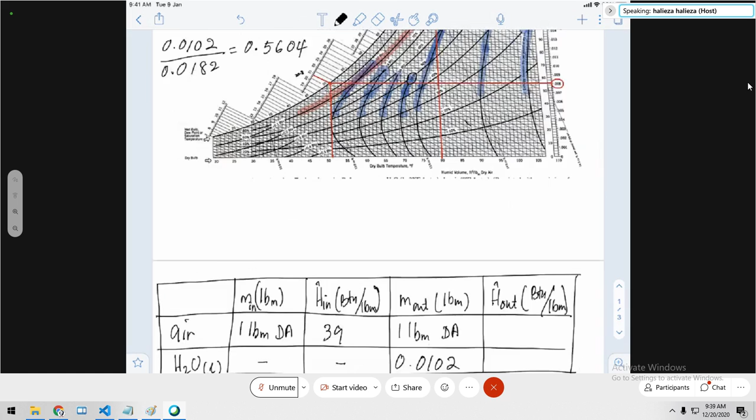So now we already managed to get the enthalpy just now of the inlet air. We have 39 for the inlet air. For the outlet air, just now we got a value of 20.8. So what do you think is the amount of the enthalpy for water, liquid water coming out?

Anybody? And how to get it? From saturation tables, steam table, you mean? Yes. Okay, let me see whether I have my steam table over here, in the appendix. We need to look at English unit.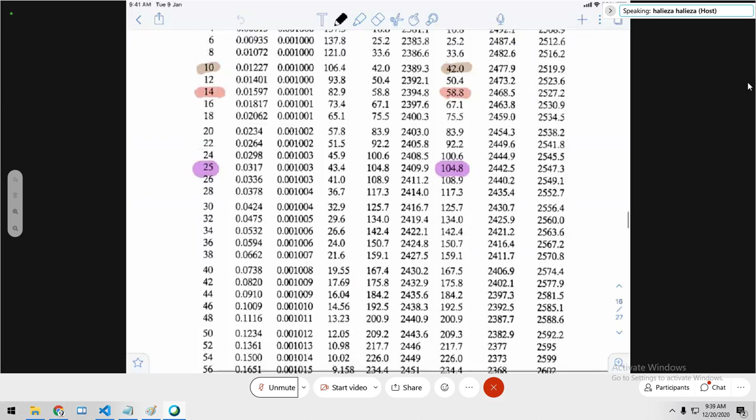Wait, steam, no, not the one. This is in SI unit. We have English unit, guys. I seem to be just looking at English SI unit. Okay, that's SI unit, no longer steam table. This is not steam table. You don't have it.

So what to do? Any idea? We don't have any steam table in English unit, not here in this appendix, but we do have it in other references.

Convert the outlet condition to SI unit and find it from the table. Okay, since you guys... okay, I have a better suggestion rather than doing conversion. Since your test, you are online, right? Why don't you search it using the English unit? Because definitely you'll be able to find it somewhere in English unit, isn't it?

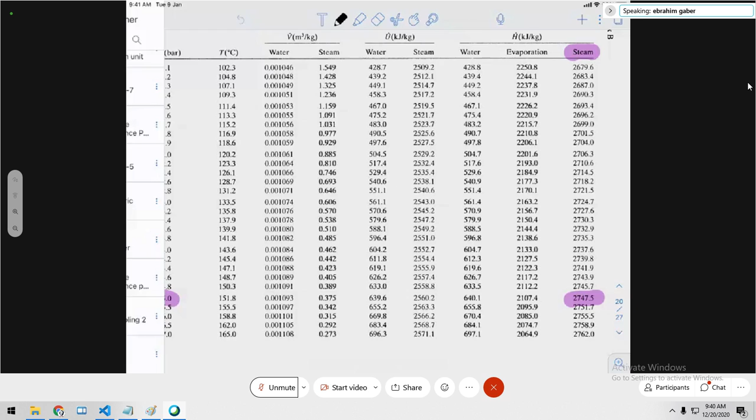Yes. Okay, but my question next is the steam table. Just now when you did the reference state, you mentioned that the reference state for the water is liquid. I'm going to highlight it at temperature of 32 and... You have to make sure that your steam table has the same reference state as that condition, or else you cannot use that steam table.

If your reference state is not at that same condition, your other choice is to do integration using the polynomial equation, because you have a different reference state from the steam table, so you cannot use the steam table. You have to make sure that the steam table has the same reference state as your reference state.

So I'm not sure whether I have that value here. Let me show you guys, I'm trying to find my steam table in English unit. I do have it, hold on. I have it in appendix from Geankoplis. You will be using this textbook, Geankoplis, when you do your mass transfer and heat transfer. Let me try to get it... oh dear, where is my Geankoplis reference? Hold on, let me find Geankoplis. I'm going to use this textbook as your textbook when you're doing your heat transfer and separation.

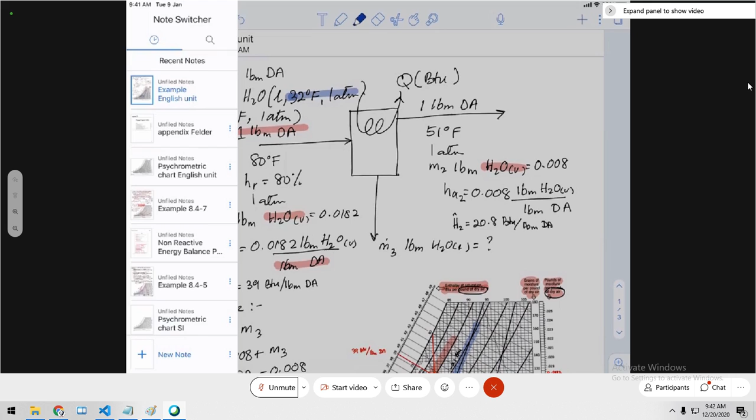One, I'm still searching. Okay, I saw it just now. Okay, I'm going to unshare this. I'm going to look at our Geankoplis appendix. I'm going to stop sharing this. I'm going to share you guys the Geankoplis appendix. Let me see, where is that Geankoplis? Okay, hold on. Let me get this bigger so that you can see. Now I'm going to share you guys the screen.

Okay, did you manage to see that, guys? This is the appendix A.2-9, that is in SI unit. That is in SI unit. This is in English unit. Can you see appendix A.2-9 in English unit? Can you see, guys? Yes, yes, yes. Good, okay.

What is the reference state? Somebody give me a reference state for this steam table. Appendix A.2-9, 32 Fahrenheit. Okay, liquid. Good, liquid, okay. The enthalpy is 0, you can follow my cursor. My enthalpy is 0 at liquid water, and the temperature at that enthalpy 0 is 32.02. So that is your reference state: 32.02 degrees Fahrenheit and liquid water. So that is your reference state.

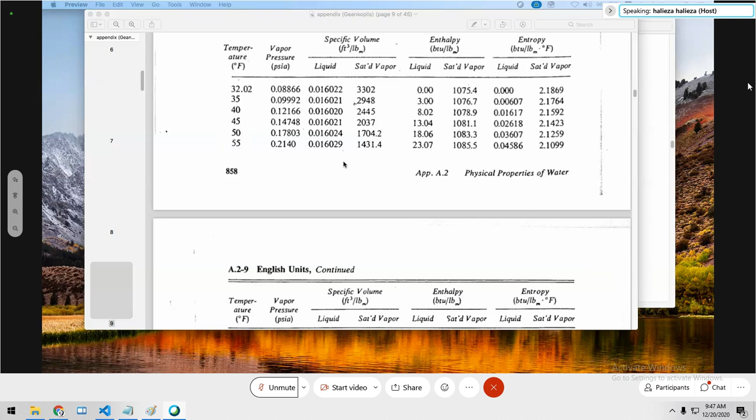Is the unit BTU per pound mass? Somebody double check if you interpolated it from the appendix, from table A.2-9, between 50 and 55. That's the value. Yes, each correct. Thank you.

Thank you very much. Okay, now let's go back to our iPad. It's almost 10 o'clock, let's finish this example. This is a typical example we already looked at in SI units, but unfortunately we have this example in this unit. So just do the same method, the same procedure, except you'll be using the psychrometric chart in English units.

Okay, now we have everything here, 19.31, so write that down. Now you have everything filled out. Write your energy balance - for this open system you have your change in enthalpy, your change in potential energy or kinetic energy. Your change in potential energy is equal to Q, your heat, plus your work shaft.

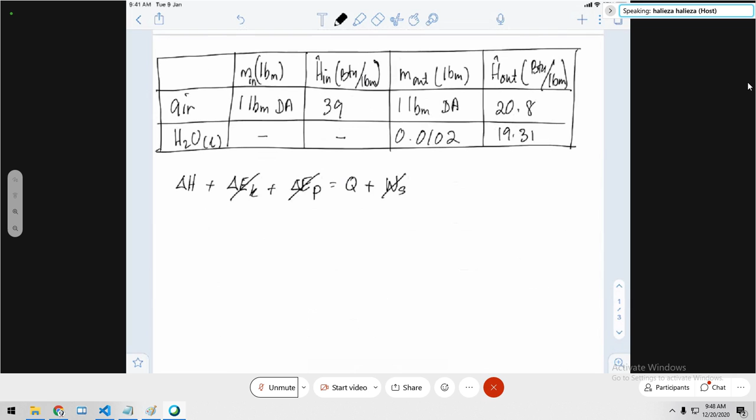Drop off your potential energy, kinetic energy, and work shaft - give reason, I'm not going to write it down. So you end up with your final equation: your heat that you need to calculate is the change in enthalpy, that's your mass times its specific enthalpy, summed across the specific enthalpies.

So let's do the calculation based on the table. You have 1 times 20.8, that's the value for your outlet air, plus your water times 19.31 - that's the outlet water that condenses. So the amount for the inlet air, let me write 1 times 39, that's the inlet air. So if you do that calculation, what will be your answer?

The answer's unit will be BTU because you already cancel off the pound mass. Somebody give me a value. Minus... 17.8? Minus 17.8, thank you. So that's minus 17.8 BTU, that corresponds to 1 pound mass of dry air.

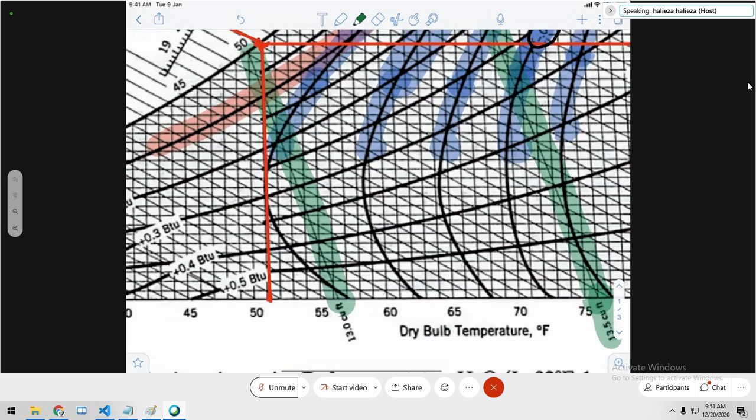So where is our point? Our point is not really on the 13 cubic feet of volume, it's slightly more than that. So you need to do an interpolation between these two lines that I've highlighted in green. Let me get the line that is parallel to this line, using a different broken line.

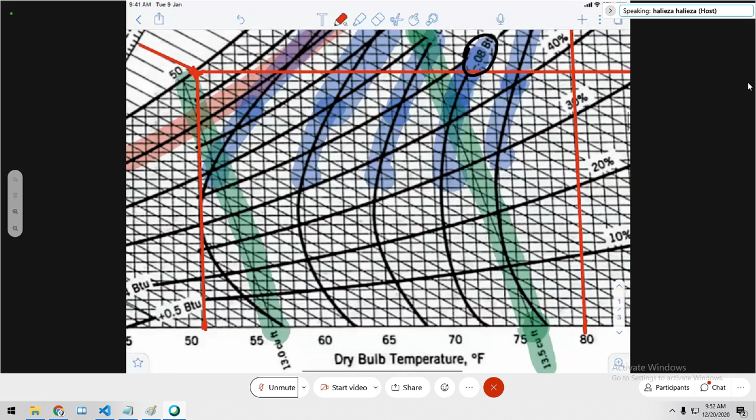Okay, so let's do that. This is our outlet condition. We need to get a straight line that is parallel to it. How parallel can I get? Okay, that's it. So how to calculate?

Anybody? We have to do the interval again, same thing we did before. How many intervals do we have here? Oh, this is difficult, isn't it? We start from here - that's 1, 2, 3, 4, 5, 6, 7, 8, 9, 10, 11, 12, 13, 14, 15, 16, 17, 18, 19, about 19.8 intervals. That will give your distance of the difference of 13.5 minus 13.

That is going to be 0.5. Sorry, somebody get me one interval please - calculate for me one interval.

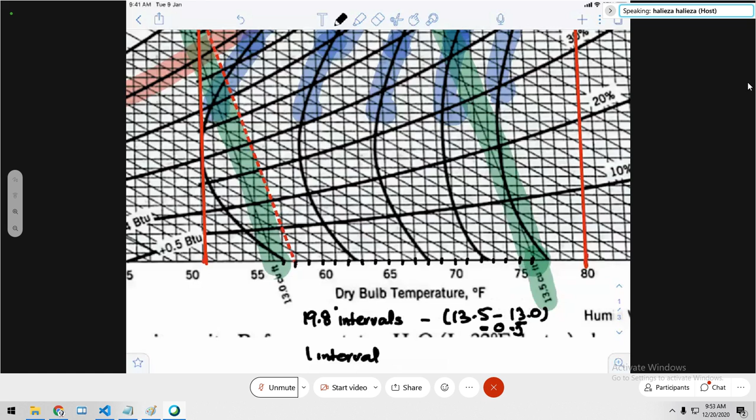What is one interval? 0.0252... you divide 0.5 over 19.8. 13.5 minus 13 becomes 0.5 divided by 19.8 intervals, we get 0.02. That's one interval.

So now we stop here. So how many intervals do we have? We have 18 intervals. So what is the distance from 13.5?

So 18 times 0.0252, that will give us a value of 0.4536. So that value, that humid volume of the outlet A, is about 13.5 minus 0.454. Why minus? Because I'm going towards the left side, so I'm deducting it from 13.5 — it should be a lesser value.

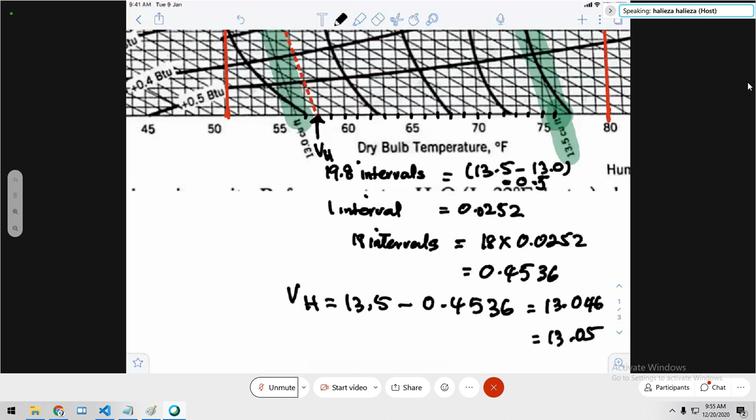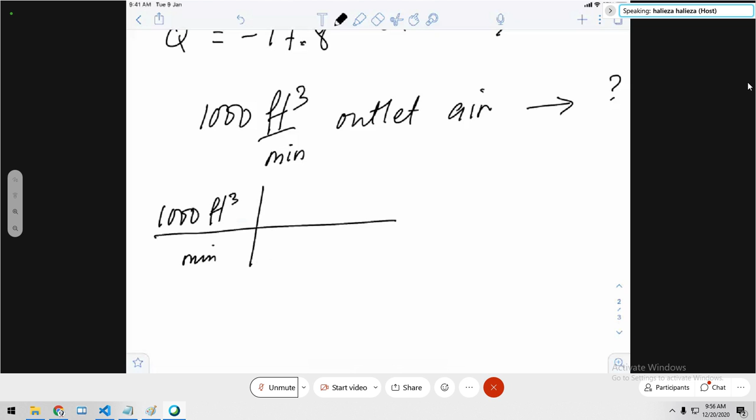That's cubic feet per pound mass of dry air. So change that based on your value of 1,000 just now. You have 1,000 divided by that in order to get the dry air: 1,000 feet cubic per minute divided by 13.05 feet cubic per pound mass dry air. Yes, okay, so that is your pound mass of dry air.

I'm going to speed up, I'm not going to calculate because it's almost 10 o'clock. So whatever answer you get there corresponds to the amount of dry air of the outlet. But the amount of dry air we used as our basis just now is 1 pound mass of dry air. For that amount, we calculate the Q and we got negative 17.8 BTU — that's the amount of heat that is going to be removed. So if you have that amount of dry air, what is your Q that is going to be removed?

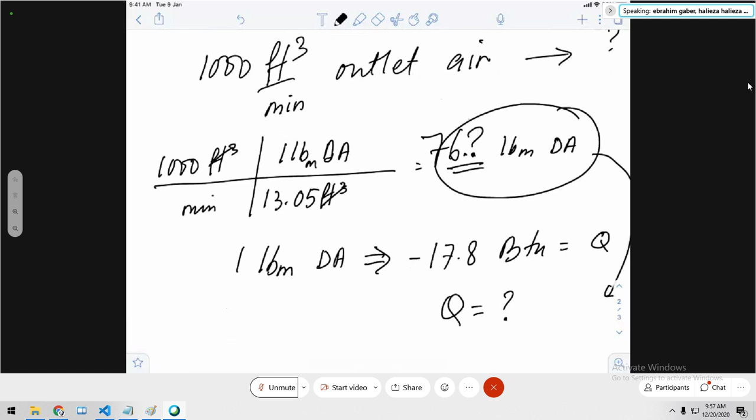We're going to times the Q by the amount of dry air — that's how you do it. It will be a huge value because that value you get here is quite big: 1,000 divided by 13.05 is 76.62. So 1 pound mass of dry air gives you a value of minus 17.8 BTU.

So if you have 76.62 pound mass of dry air, what is the Q? Just interpolate it: minus 17.8 BTU per 1 pound mass of dry air, and you have 76.62 pound mass of dry air. So you cancel that and get your final answer: 1363.8 BTU — remember the minus sign.

Yeah, per minute. Why is there per minute? Because that is per minute — this is per minute. So that it will be per minute. So that is your final answer.